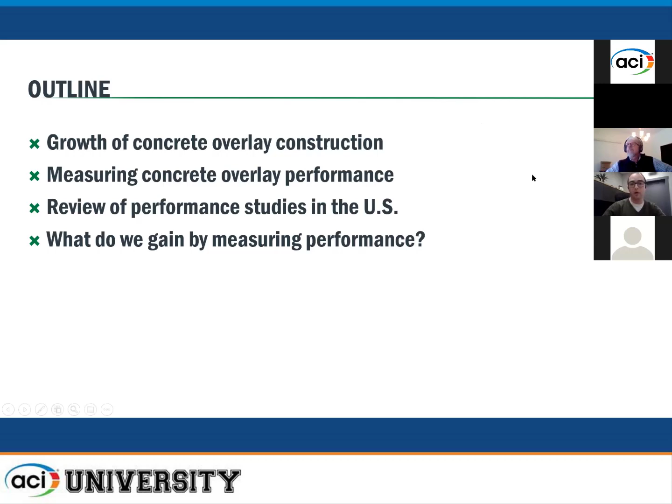Concrete overlays, again, are still a relatively new thing in the world of pavements, but they're something engineers have been thinking about for a long time. I really like this sketch—the concrete paving engineer for the Iowa DOT found this a couple of years ago.

It was plans for a concrete overlay that were put together all the way back in 1949. I actually don't know if we ever figured out whether they built it, but you can see the engineers at the Iowa DOT were trying to think of something new, turning it over in their head. There were probably experimental projects built over time, probably about the 1970s and 80s.

At least I know that's the case in Iowa, which was a relatively early adopter of concrete overlays. That was when they started putting them into practice more often. There's a famous project in our world on an airport runway in Storm Lake, Iowa—one of the first major concrete overlays of asphalt here that helped kick off a lot of concrete overlay construction.

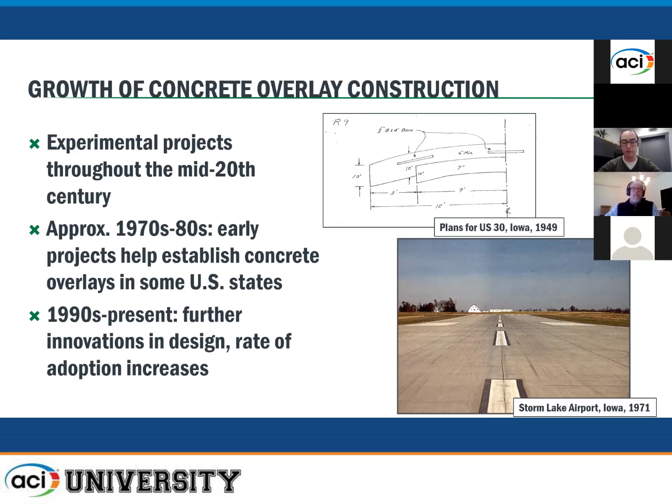Moving from there, from the 1990s on, you've seen more states adopt concrete overlays. There have been a lot of innovations in design—some of the thinner bonded overlays we've talked about earlier today, different materials like the fiber reinforced concrete we just saw. Concrete overlay construction has been moving forward, and you can see here, especially since about 2000, and especially in the last 10 years, there's been a substantial increase—this bar graph shows overlays as a percentage of all concrete paving.

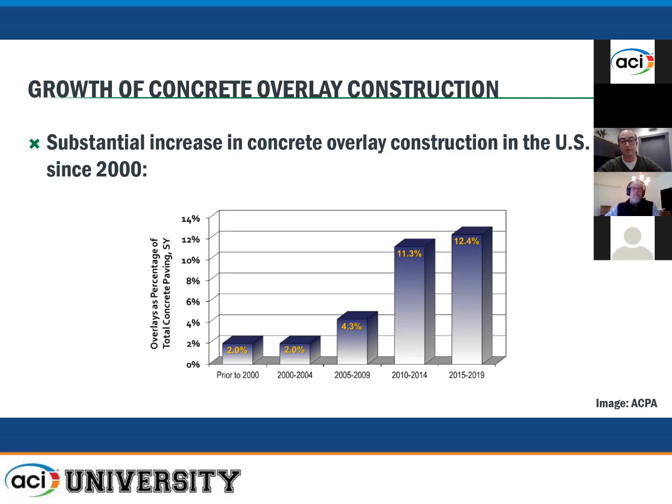They've gone from a pretty small niche thing, done here and there, to being a pretty regular part of the pavement system. Depending on what state you're in—like in Iowa, for example—we usually see something like 20-25% of our concrete paving every year being concrete overlays. So in some places, they've definitely become a regular part of the system.

This map shows the Midwest has been a pretty big adopter of overlays—Iowa, Illinois, and others have been building them for a while. But not to leave out, we've had a lot of overlays built in other states like Colorado, Oklahoma, and Pennsylvania, and that's only been increasing over time. So we've been seeing more and more, as they begin to spread.

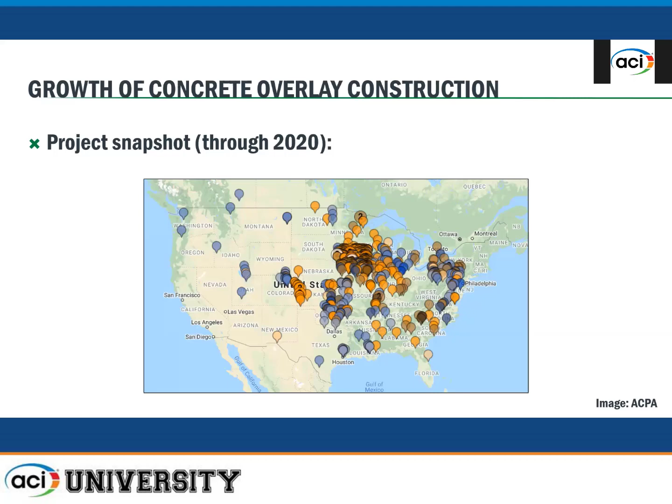They are new in some areas, but like Peter already mentioned with the same metaphor, in other places they're one of the tools in the toolbox that pavement engineers have. So we're seeing more and more of them, especially as agencies gain experience and start to implement best practices. They're definitely something that can become a successful regular part of the pavement network, and engineers can use them to evaluate candidate projects.

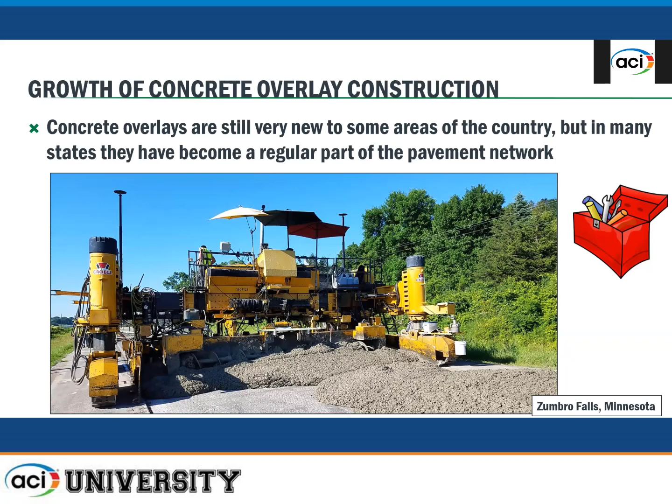So with all of that, it's great that we see more and more concrete overlays. But especially whether you're a state that's just getting started with them, or a state that's been using them a while but considering whether to continue, whether you're doing things the right way, or want to make adjustments, it's important to look back and figure out how these pavements have actually performed in the field. We want to know what performance life and service life we can expect from these types of projects, and what's working and what's not.

You have pictures of two pavements here. One of them was quite a bit older than the other, but that one performed a lot better than the pavement that was younger. So what are those design practices, design methods, and other things that go into evaluating, designing, and building concrete overlays?

There are a lot of lessons we can take away by looking back at performance, and I'll come back to that project pictured on the right, because that turns out to be something pretty significant that we've used to improve our practices going forward.

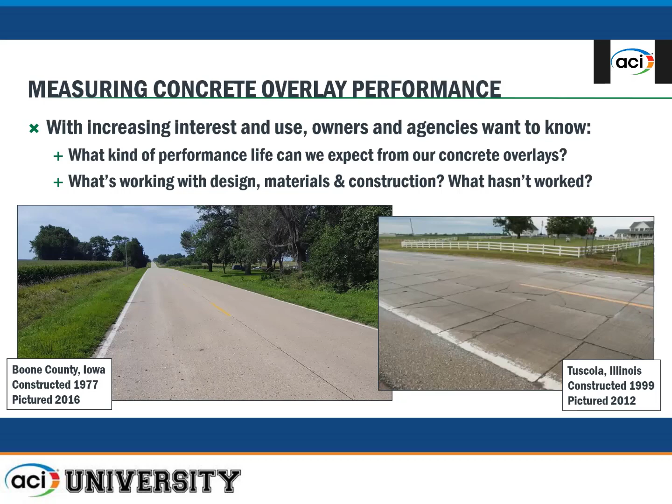What we haven't had as much of, in general, since concrete overlays are a relatively new technology for the whole pavement realm, are really comprehensive reviews and analysis of large data sets. There haven't been as many instances of those, but we're starting to see some now, and I'm going to show some examples in this presentation.

Part of the limiting factor is that concrete overlays are relatively new and the technology has been changing. We've only been building concrete overlays with things like short joint spacing, the 6 foot by 6 foot panels, fiber reinforced concrete, or the new geotextile interlayer—all things talked about in this session—for about the last 10 to 15 years. So sometimes we just have limited data.

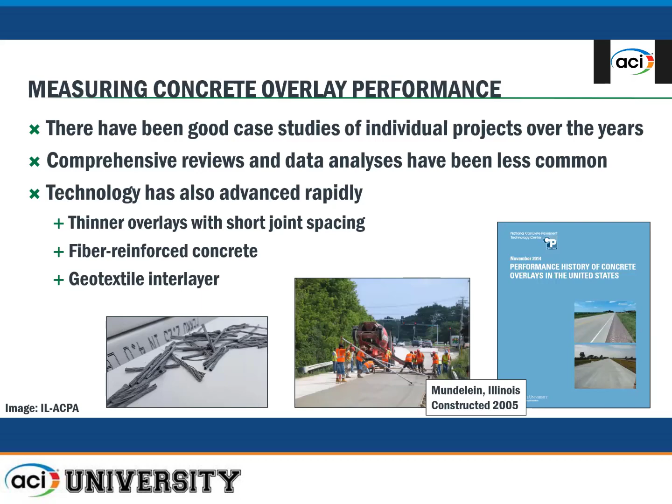The best we can do is a case study. But as these projects begin to age—that photo in the middle is from a project in Illinois that, as far as I know, was one of the first fiber reinforced pavements built as a regular project, not just a test strip—that project is 15 years old now, so we can start to learn more by evaluating its performance.

And again, these projects are becoming increasingly common. We have a lot more older projects now that we can really take information away from. So we do have some examples now of more comprehensive reports of performance, which we'll be going over here.

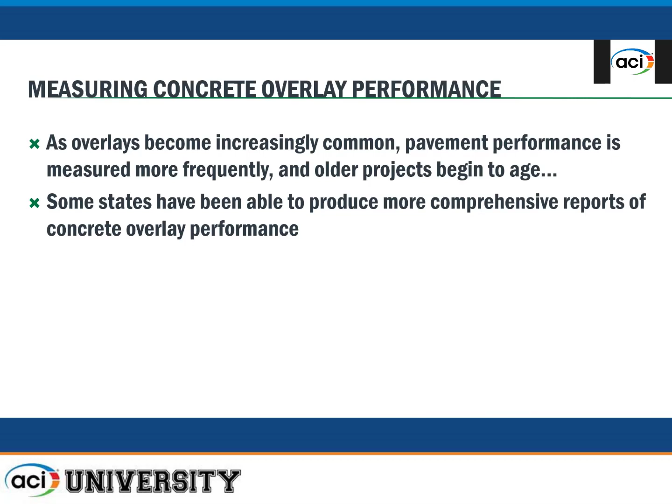Before we dive into that, depending on your background—if you work with pavements commonly, you're probably already familiar with the types of performance data collected to assess pavement condition. But for anyone who isn't, all this data is usually collected by vans equipped with instruments able to assess the condition of the roadway.

Some of the common metrics would be something like International Roughness Index, which is a way to measure ride quality. That's an extremely common one you'll see in this presentation that different states look at, and you'll see it referenced for all sorts of pavements to define the pavement network all over the country.

Obviously you can use this data to count cracked slabs. You can measure faulting if a project has significant levels of it. For friction, you can do image analysis to try to tease out whether joints are spalling, and whether that might be caused by materials related issues.

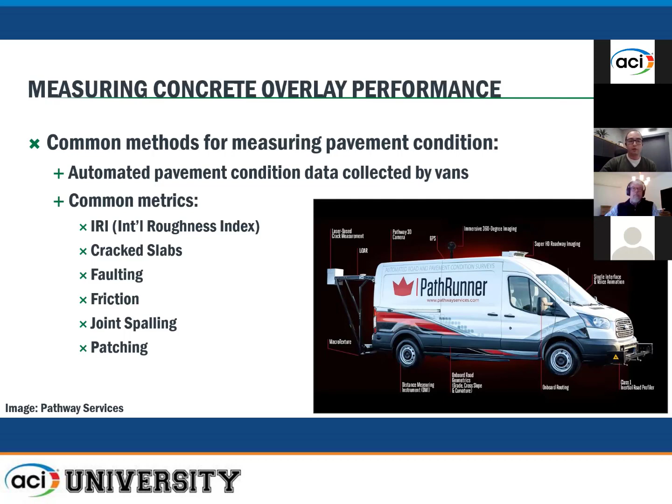Patching is an interesting one sometimes used to characterize pavement performance. Long story short, all of those come together, and usually you'll see agencies calculate something like an index, just to try to put one number on a pavement to characterize its overall condition, or maybe its remaining service life.

Some of the terms you'll see used, at least what we use in Iowa, is pavement condition index, or PCI, which is a 0 to 100 scale, where 100 is when the pavement was brand new, newly constructed, and 0 is the pavement completely fallen apart.

Different agencies will have different indexes that run on different scales. You may see it in terms of remaining service life, where they're trying to translate that condition index into something like, we can expect 10 more years left in this pavement. There are examples of both types of indexes in this presentation, but if you aren't familiar with that, that's a very normal tool.

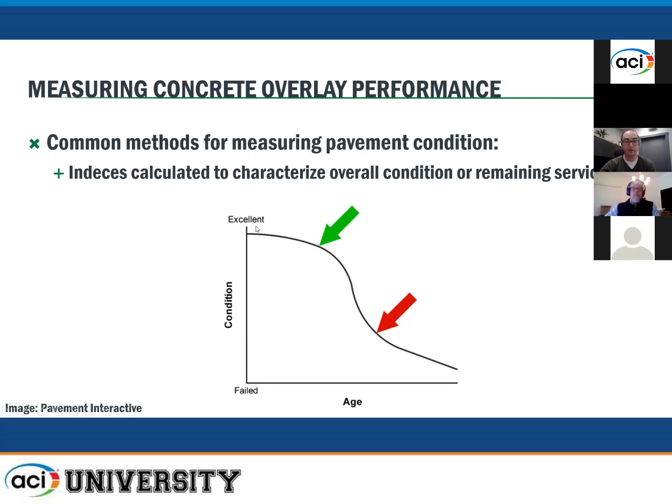I think Peter and Kurt both had examples in their presentations today showing what a usual condition curve looks like. It usually has a shape, or at least the theoretical shape, where the pavement remains in excellent condition when newly constructed, and then over time it deteriorates more and more, and maybe reaches a terminal point where it needs to be replaced.

Or rehabilitated, evaluating lots of different rehab options, including concrete overlays. We can use a curve like this to assess the performance of a concrete overlay itself, and we have lots of examples of that here.

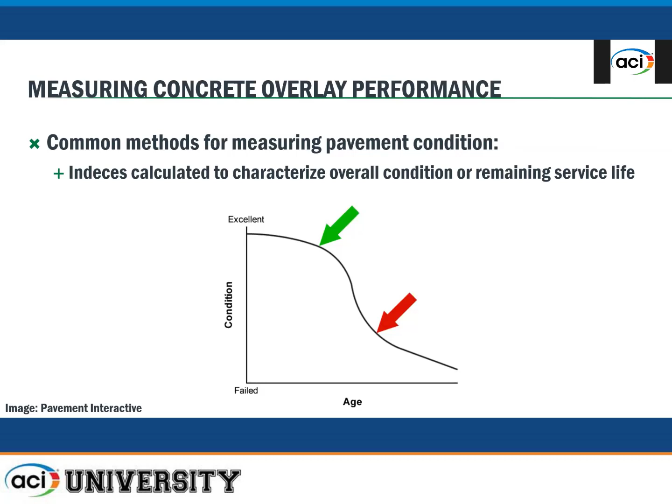So, to get to what those performance studies have looked like for these projects in the U.S., I mentioned the CP Tech Center's report from a few years ago, which was nice because it selects projects that were built in all sorts of climates.

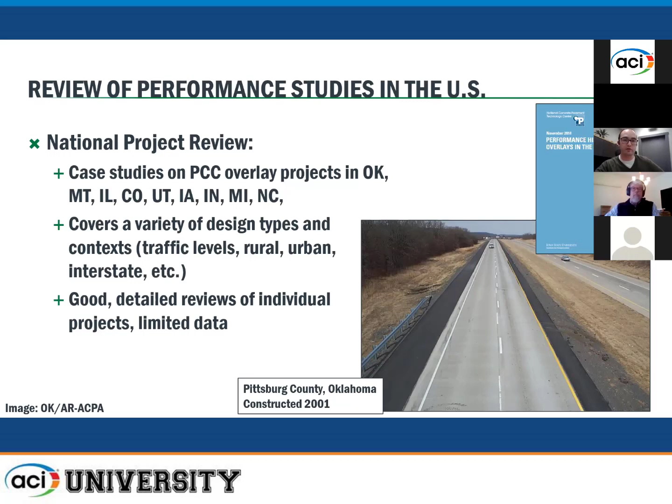Case studies like this are always nice because you can get into a lot of detail about the performance of an individual project, but the data set itself, if you're looking for a large volume, a big data type data set, you're not going to have as much there. So there's a lot we can learn from studies like this, but as more and more projects are built, we have the ability to dig in more and do some data analysis with larger sets of performance data.

Another thing that's out there, if you're plugged into the industry, especially if you work with concrete overlays a lot, there are many states tracking performance in-house and putting together their own databases. They may use it to make decisions, but it's not necessarily published data. So I wanted to show an example.

This is from Colorado. They look at the performance of their projects in-house and keep track of where they are, both the agencies and the industry there. Although I don't believe they've ever published any of this performance data as a formal study.

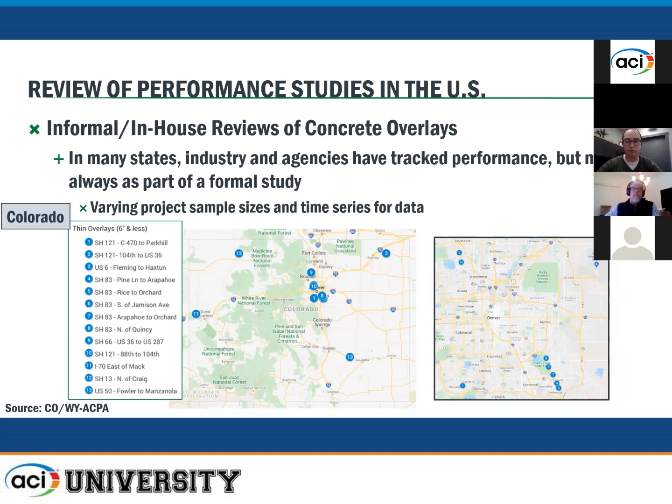You can see here they're tracking where they have thin overlays of 6 inches or less. Commonly, those are bonded concrete overlays of asphalt. So they have a database where they know where all these projects are around the state, and they've tracked how many millions of square yards it constitutes. They've divided it between different overlay types, and here by thickness in these examples.

Based on the data they have in-house, they know a lot of these projects have been able to fulfill a 20-year design life, and they still have some life remaining. They're using one of those remaining service life type metrics here, where they know they have about 8 to 10 years left in a lot of these pavements.

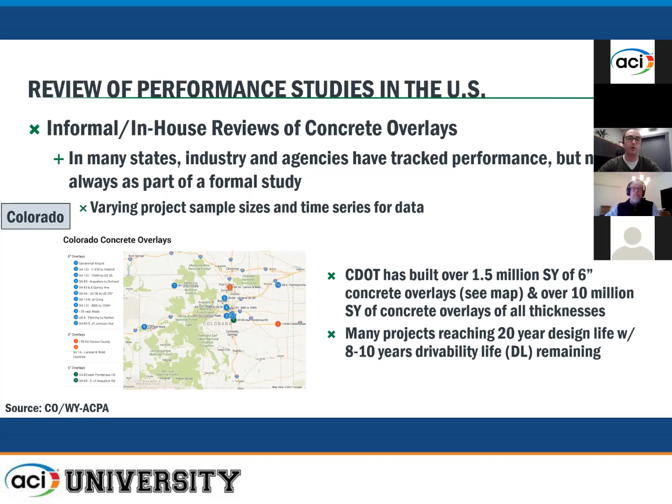This type of information is great, but if you're not super plugged into industry, you don't always have access to this, or you might not know where to find it or who to ask. So one of the things I wanted to make sure to include in this presentation is a summary of things that have been published, so you can get a reference point and see things distributed more widely, peer-reviewed, and things like that.

So starting out, Illinois was kind of another one of those early adopter states for concrete overlays. In particular, at the time they were calling it ultra-thin whitetopping. This would be BCOA, as has been referred to during these sessions here. Again, those are those thin bonded concrete overlays of asphalt.

But several years ago, a report was published doing a survey. It was mostly a survey-driven study. There was some structural analysis of these pavements and crack surveys and things like that. It wasn't quite a lot of the same automated condition data as a lot of other studies, but it was a good sample size because Illinois probably was the earliest adopter at a relatively wide scale.

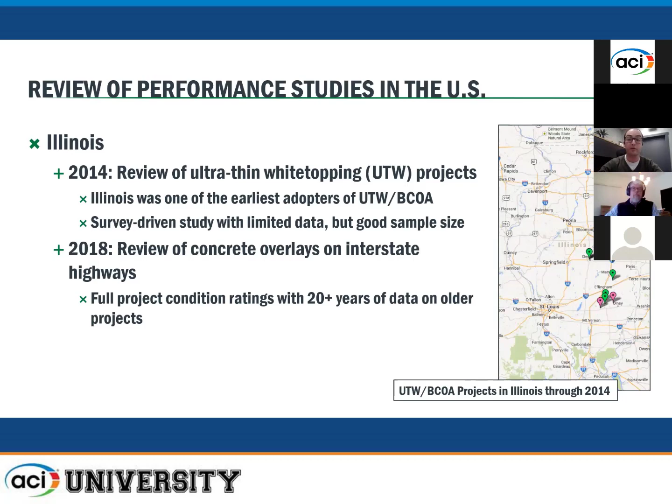And then also in recent years, they've published some performance assessment with kind of the normal pavement performance data of concrete overlays that have been built on the interstate system there. And some of those projects are quite a bit older. They go back 20 plus years. I think one of the projects there is more than 30, but so they've done some of that type of assessment as well. For those ultra thin white topping or BCOA, again, thin bonded concrete overlays of asphalt, they found

so far that a lot of those projects are on track for about a 15 to 20 year service life, which is probably what the design life was intended at the time. And they've also found some of those newer ideas and concepts that we have now, like the fiber reinforced concrete, that they do seem to improve performance of the system and help mitigate some of the distresses that were seen on some of the earlier projects that were built before those types of technologies were available.

I do have some slides summing up some of the things that we've learned from these studies later. So I'll have some examples on how fibers can help improve performance there.

For their interstate system, they found some really nice long-term performance. Again, these are mostly thicker unbonded overlays, or at least especially those older projects. And that's the plot you see here, where they have an index here. The plot shows it running from between 4 and 9, but obviously the higher number is better.

And you see performance of these pavements projected to decline over time. They just have a linear fit here. But basically, they're showing about a 30-year projection to the point where it gets to be a poorly rated pavement for their thicker unbonded concrete overlays, some of which are CRCP overlays actually on the interstate system.

So they're seeing some good results, again your design life context might be different. Thinner bonded overlays tend to be designed for, you're using them to maybe not have to get so many years out of them, but you can see that you can also design your concrete overlays to last a long time by using one of those thicker unbonded systems. So kind of good examples of both here.

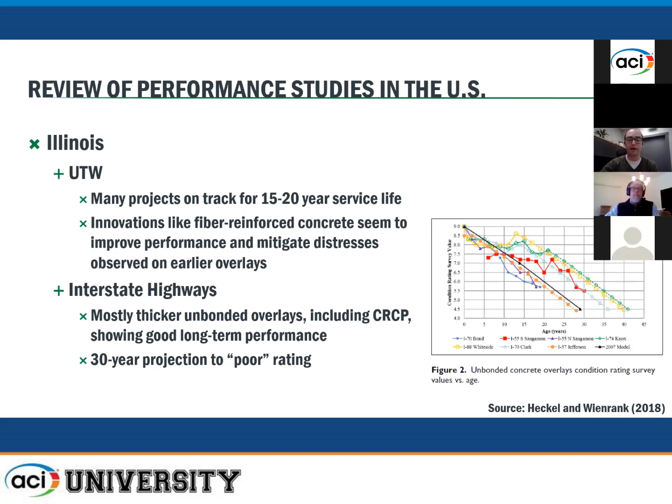In Iowa, this is a study that we did a couple of years ago. You can see I repeated the map. Iowa really probably was the first state to really adopt concrete overlay construction at a wide scale. We have more projects here than any other state. The data we collected was through the year 2015, so it was over 500 projects at that time.

And it's quite a few projects that have a lot of age. Almost 100 of those were actually built before 1990. So at the time that this data was all captured, that's 100 projects that are all at least 25 years old. So a great data set to work with, a lot of information.

And the market for concrete overlays in Iowa is mostly concentrated on the rural county highway system. So that's kind of the main focus, though we do have examples of all types of overlays that were included in this study, some that were built on higher volume highways. We have some that were built on the interstate, divided highways, city streets as well. But a lot of them look like the one that's pictured here.

This is very typical for what concrete overlay in Iowa on a relatively low volume county road, maybe like 150, 200 trucks a day. Commonly, the common design here is something like a 6-inch thick overlay, which is probably right on the border between, if it was on asphalt, right on the border of what you would consider bonded and unbonded.

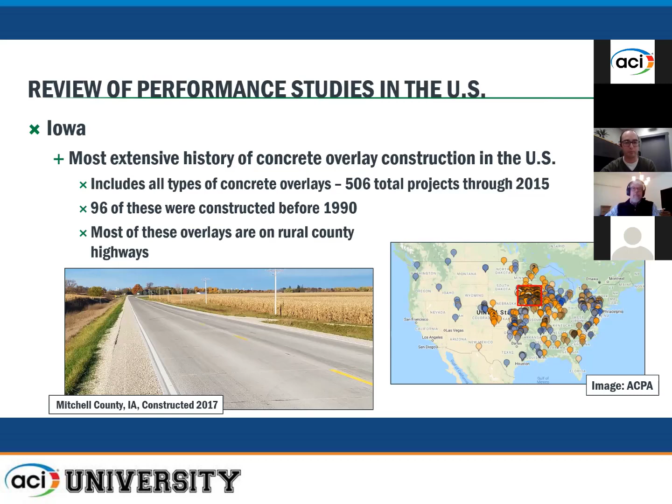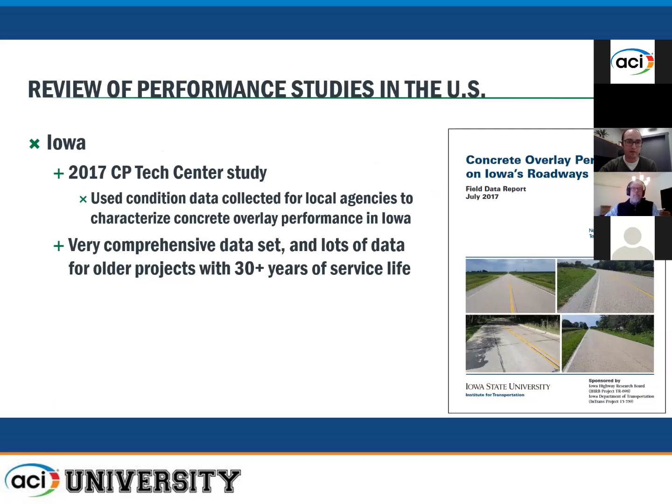Really, it's probably an unbonded system that it's most related to. But anyway, we did this study a couple of years ago with the CP Tech Center. Very comprehensive data set with all different types of projects and older projects as well.

I won't dive too deeply into the results here because the report's long and has lots of good examples, so I'd refer to that. But you can see that for the set of projects we have in Iowa, we had some very nice long-term performance with just a simple linear trend in terms of our pavement condition index on a 0 to 100 scale. We were seeing about a 35-year service life to get to that fair condition, which is usually where local agencies start.

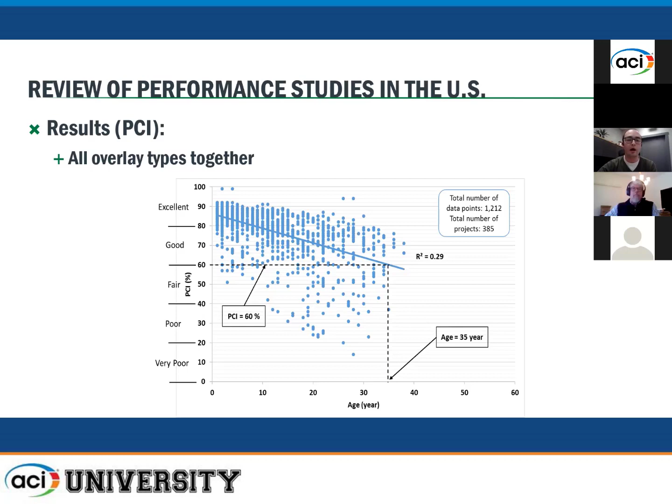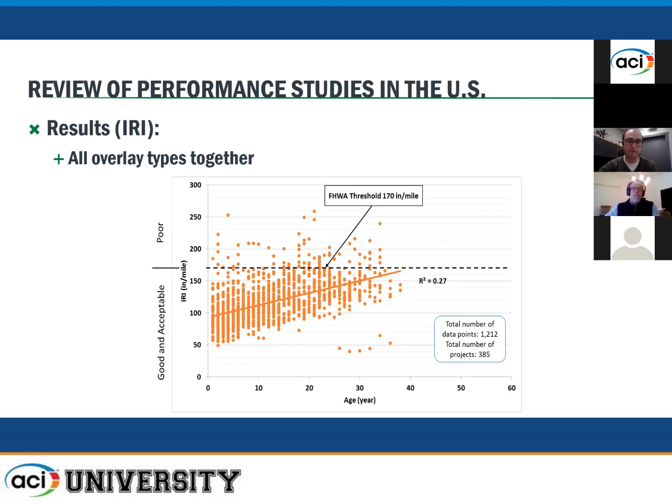Well, DOT as well, but it's when agencies here kind of start evaluating rehab options. If you just put it in terms of IRI, a metric for ride quality, it's a very similar story. Again, with a simple linear plot, you're getting up to that 30 to 40 year range before you get to the threshold that FHWA uses to define when ride quality starts to become unacceptable.

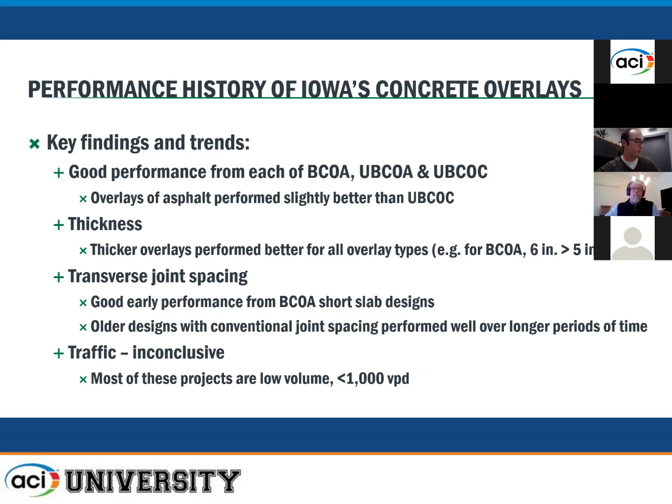All the different types of projects, both bonded and unbonded systems over concrete and asphalt, all performed well. Other than bonded concrete on concrete, which, as mentioned earlier, isn't very common at the moment. The other types of systems that are part of the regular practice today did well. I don't want to spend too much time on this because I want to make sure we get through everything, but you can go look at the report for more of these results.

Concrete overlays here, we see quite a few projects built every year on the county highway system. They seem to work really well in that type of context.

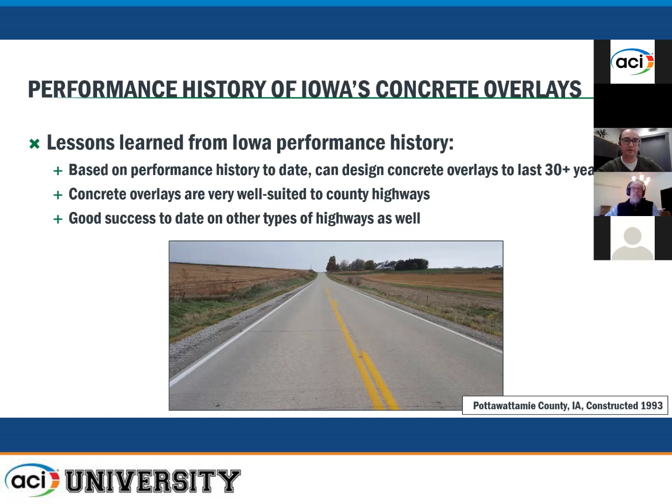And then the last state that has one of these comprehensive types of reports is our neighbor to the north, Minnesota. For quite a few years now, they've been building thicker unbonded concrete overlays as a long-term rehab solution. More recently, they've also been adopting overlays of asphalt, or whitetopping, some relatively thin and maybe medium thickness.

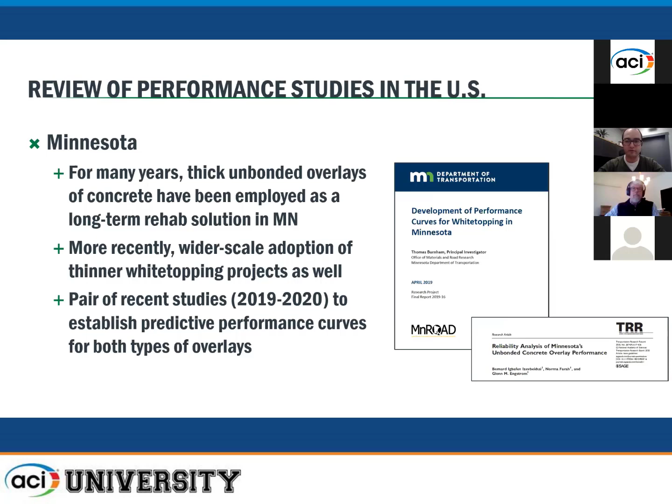So mostly bonded, though - they've looked at a lot of BCOA projects, and they've done a couple of studies recently. Just to share some of those results, their whitetopping projects tended to be on lower volume roads, similar to Iowa county highways.

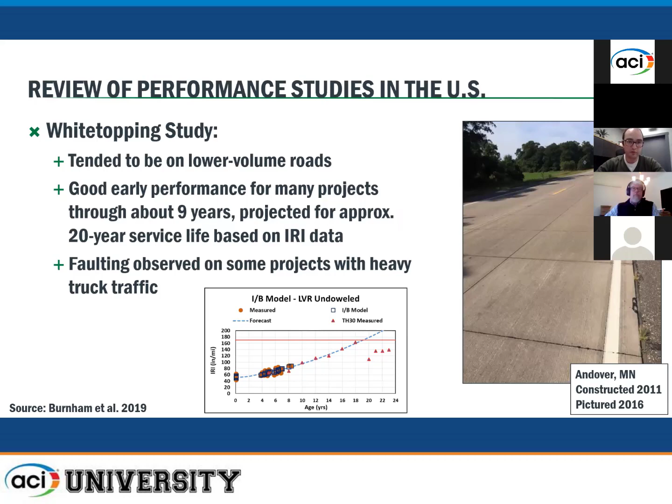They've had good early performance from some of these projects. For a lot of them built just within the last 9 or so years, they're projecting approximately a 20-year service life. One thing they found in some projects built with heavy truck traffic - they did observe some early age faulting, which was one of their notable findings to keep in mind.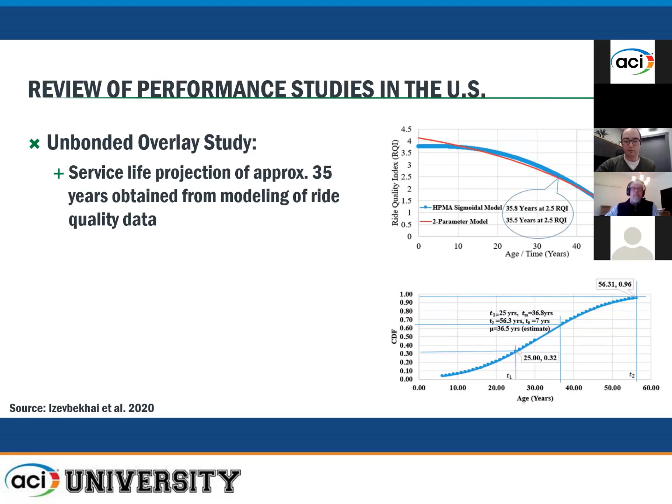For their thicker unbonded overlays, these have proved to be a great long-term solution, and they're projecting about a 35-year service life. These reports are both available if you Google it, or if you go to MnDOT's research studies.

Just a quick review - not just graphs and charts, but all these studies have involved going out in the field to see those outliers, or even just to look at what a typical project looks like. It's always good to actually do some investigation on things that might have gone wrong, or to understand better why things are going well when they are.

So some of the unique findings we've used to try to improve both design and construction practices and ensure good performance going forward. I want to make sure to note everything Tom talked about in his presentation earlier about using good materials and good mix design practices. That's really important because you can have a perfectly well-designed overlay, but if you don't use good materials, you're going to get early age failures.

That was actually in the Iowa study - when we looked at those projects that didn't perform as well, that was the number one problem we'd find: it was a pavement kind of like the ones pictured here that have obvious materials-related issues.

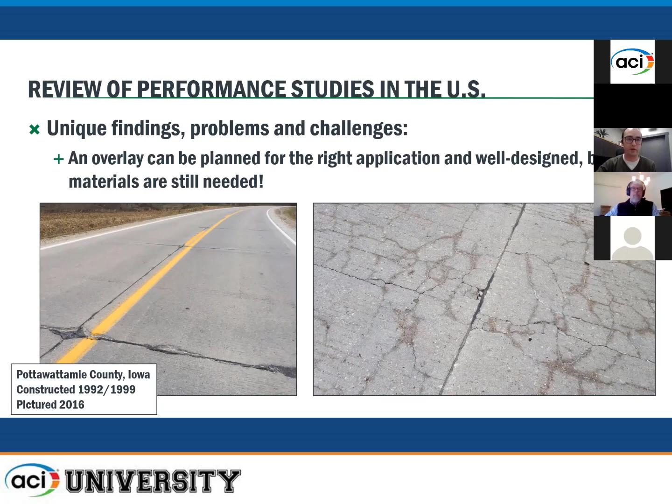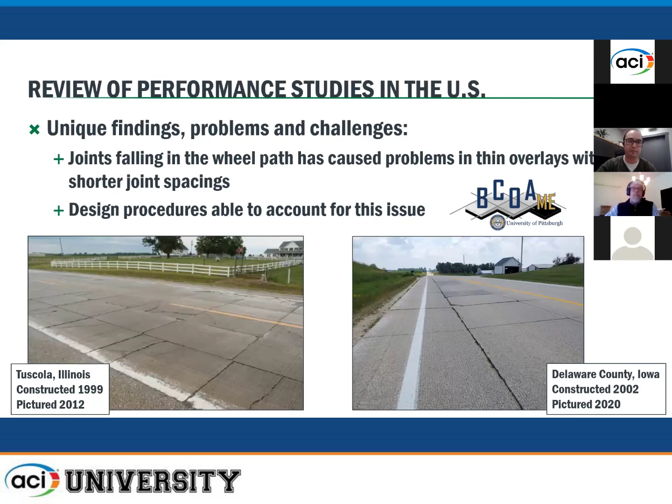This is something we've been able to address moving forward. Design procedures now, like the BCOA-ME design procedure from the University of Pittsburgh, use separate models for those 4 foot by 4 foot panels to account for problems that can arise from those situations. So coming out of this, if you're using a thin bonded overlay, 6 foot by 6 foot is now the most common joint spacing for those types of projects.

Sometimes we've seen things like joint misalignment and panels that seem to slide, and this mostly happens in thin bonded concrete overlays of asphalt. Sometimes we think it may lead to blow-ups, but something we've found so far, in the relatively short history of using fiber reinforced concrete, is that it might be one way to help mitigate this issue. You might have a panel where the joint opens up, and between traffic stopping and starting or things like that, these panels can come out of alignment. But fibers might help mitigate that.

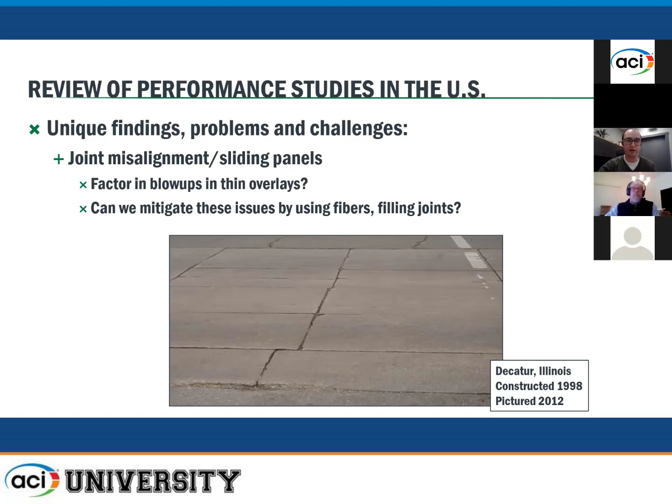Filling joints—on some projects joints would go unsealed, and that might be related to issues, maybe related to blowups too. But filling joints might be another solution that's working. It's something these studies are still digging into, and that we're still looking at as an industry.

We've looked at joint activation, sometimes when we saw these short joint patterns in concrete overlays ending up with 6 by 6 panels. The initial stress buildup at early age might not actually be enough to activate all of these saw cut joints, and it's possible this might lead to dominant joint behavior over time, which could be a factor into stresses—you might have a system that's not performing the way it's designed. So should we do something to adjust our design and construction practices to account for this?

Something they've been doing in Minnesota within the last few years, at least tried on a project here or there, is that when the pavement's been about 24 hours old, or about the time they finished saw cutting, they've been running the water truck up and down the slab, and they've noticed that seems to cause more joints to initiate in the first several days. Just by looking at the edge of the slab, they seem to think that's made a difference. And again, using fibers—the way fibers can take on some tensile stresses—may play a role in all of this, but it's something industry is still looking into.

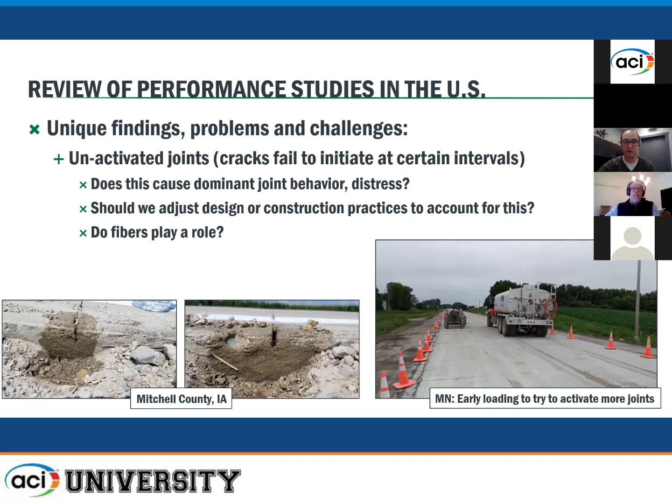CP Tech Center had a study really digging into this a couple of years ago, if you want to learn more about that. But again, documenting and demonstrating performance is going to be really helpful, both for agencies that are brand new to concrete overlays and ones who are continuing to build them, maybe looking at different situations or expanding their use. Being able to refer back to performance studies like this will be important.

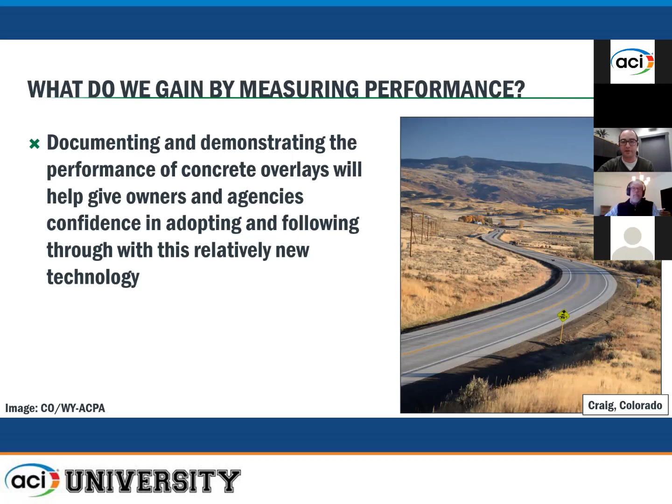That's basically answering the question of why this is worthwhile, or what we're doing it for. This will be really helpful going forward, both to help agencies feel more confident adopting overlays, and also in general improving the state of design and construction, as I mentioned. This is kind of the last takeaway point—this was when we did our Iowa study, we were just looking at subsets of the data.

But if you found a way to improve your design and construction practice to mitigate the things that have been going wrong on projects, there's quite a bit of potential performance gain. There's a lot of room to still always do better, and performance studies like this are a big part of that.

This was kind of one of the things that we put together to show this is why we like to do this, or why it's worthwhile, because there's still a lot we can improve, especially with a relatively new technology like concrete overlays, that we still stand to gain a lot from.

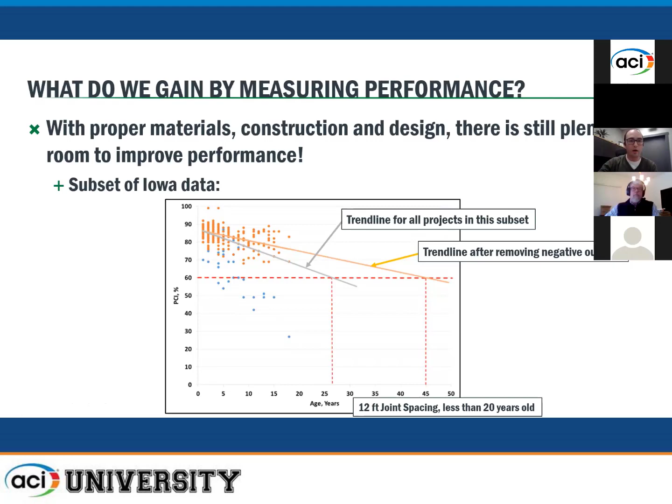So these performance studies have been very helpful for us to understand and improve design and construction processes. We've seen that in a lot of different environments, traffic volumes, and design situations, we've been able to successfully design concrete overlays to achieve and even exceed their intended service life. There's still lots to learn, but with continued growth of concrete overlay construction, we should get even better data.

In Iowa, we'd like to keep updating our data set and do follow-up studies, and maybe find some other ways to look at the data. With all that, I think overlays are really poised to continue their maturation into just a regular part of the pavement network tool in the toolbox for pavement engineers.

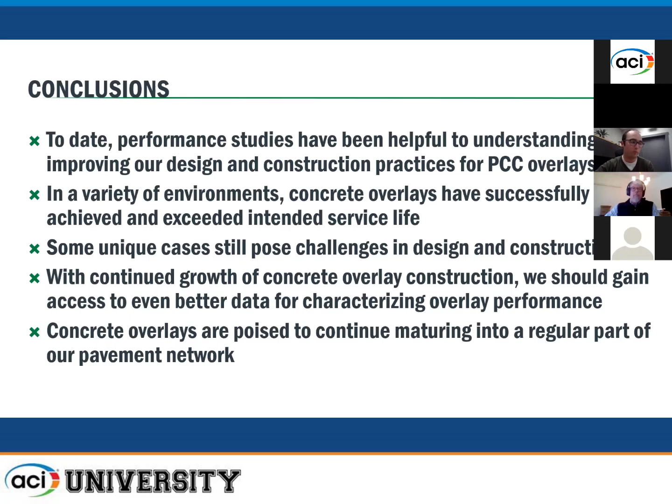Thanks very much, Dan. There were three questions for you. First one is, Iowa is the leader in concrete pavement overlays. Most applications seem to be on rural roads. Are they using overlays on the interstate, and if not, why not?

We do have some thicker unbonded overlays on divided highways, and a few on the interstate as well. It's not so much that we're not using them on the interstate, we do have projects that come up. Iowa DOT probably builds on average one or two concrete overlays every year in various contexts, but it's more that the county market is so much larger for concrete overlays that it ends up being 90% of the data set. So we've used them in just about all different design contexts, but we have about 1 million square yards of county highways every year.

And so that ends up being the main market. There are a lot more low volume roads out there, if you're tallying up just miles of pavements.

Great, thanks. And the only other question was, for a 30-year expected lifetime, what is the recommended unbonded concrete overlay thickness range? That's going to be dependent, again, on all your traffic inputs, probably mostly traffic related.

I think it was a project led by the University of Minnesota, or maybe MnDOT. It was probably done by the University of Pittsburgh, but through MnDOT. I think they just finished a brand new design procedure for unbonded concrete overlays. So that would be something to check out if you're interested in seeing what input values you might use there. Good, thank you.